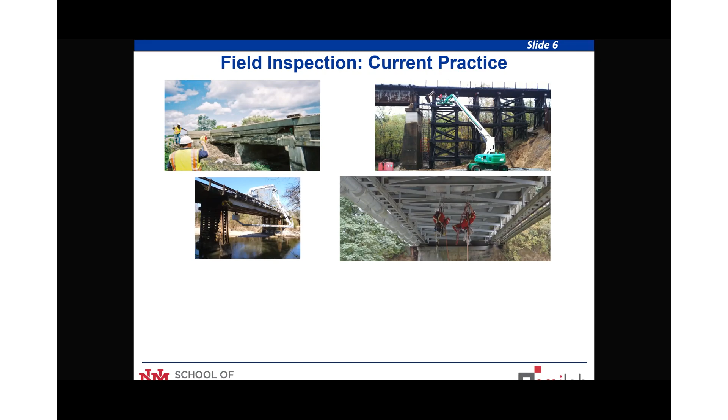So we need to do a little better than this, and from that approach we're thinking that the main decision comes from the inspection. I worked 10 years in industry, so that was the motivation for thinking about how these inspectors are collecting this information to prioritize. That's one of the core interests from Tran-SET: how to maintain and prioritize decisions from the built infrastructure out there.

We can see that, and this is at the top of the list, but humans have difficulties collecting objective information in the field, because humans are humans. So we're thinking, okay, what is the future telling us to do?

This is from the American Society of Civil Engineers. The society tells us that the civil engineer of the future will be reliant on and leveraging real-time access to living databases, sensors, and diagnostic tools to make decisions. So we think if the society is telling us where to go, universities should also go in this direction. I'm going to be talking about this data collection with technologies, and how humans can understand and be more familiar with using these technologies.

The University of New Mexico is unique not only for our national lab environment—it's a research one university, we prioritize research—but also we have a population of 67% from underrepresented groups. That's very high and very unique in the country. So one of the motivations on Tran-SET was how can we reach these minority underrepresented groups, female, from an early start.

There is an interest in attracting this first generation of students to low-cost, ready-to-use technologies to train the engineer of the future. At the same time, we try to make this technology accessible to the workforce.

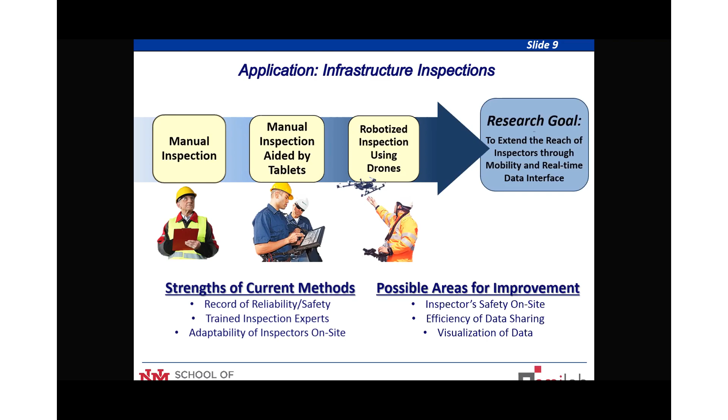In today's introduction of technology for inspections, we can see that we are doing better than before. We're bringing technology to the field, but we think this interface of data with humans can increase accessibility to this data and reduce the cost, maybe explore this interface of users and the data that is collected. And that's where the sensors become gatekeepers of that interface.

It's very important to collect these inspections to prioritize repairs, but we need to collect the information that is valuable for the owner. So I've been prioritizing on this presentation the importance of collecting displacements from railroad bridges, because owners couldn't do much with accelerations, couldn't do much with large amounts of gigabytes. They don't like gigabytes, they don't like modal shapes. They wanted to know how much the bridge is moving. So I typically stress: let's ask the owner what they need, and we'll provide them what they want.

This is a bridge monitoring setup in Chicago, using sensors attached to the rail. When the train is crossing, you can see the first two wheels, the first four wheels from the first car, are very high from the locomotive. The next ones show microstrains that are a little less, because those cars are an Amtrak car at 80 miles an hour. So you can see how sensors can tell you interesting information about the environments you're trying to explore. That's what we're looking for.

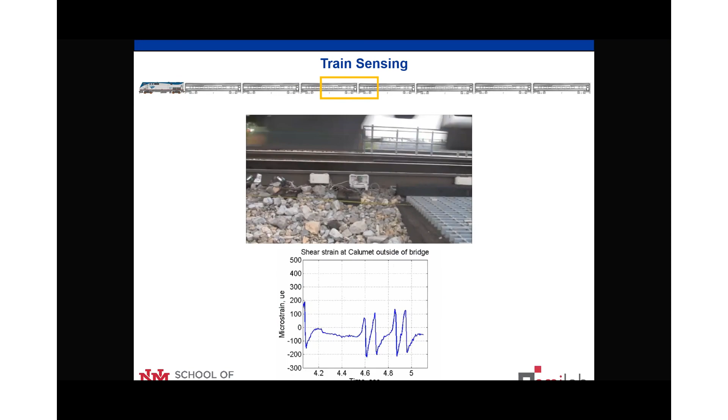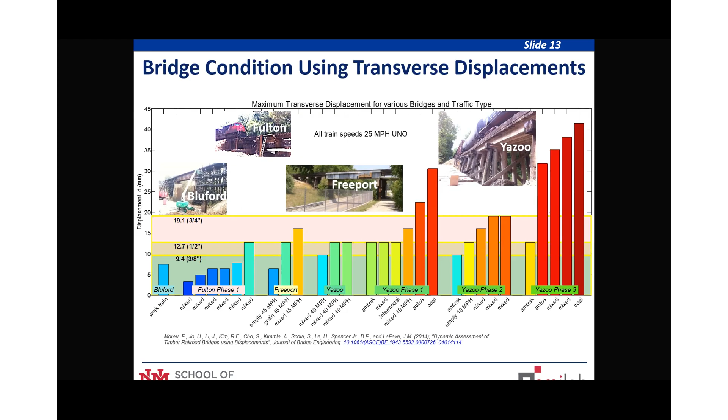So we're trying to say, hey, if we could collect these displacements with very low-cost technology, all the inspectors could attach their sensor, wait for the train, see how much it's moving, and decide if it's needed to slow the train, or if the opposite is true. If you think it's moving a lot, the sensor might tell you it's moving not as much — maybe under 3/8 of an inch, 1/4 of an inch, 5 millimeters — then you don't need to worry. Objective measurement is valuable for determining these thresholds.

We've been using a low-cost approach that's actually a convergence between low-cost technology and the accuracy we need in the field. We call it LEWIS — low-cost efficient wireless intelligent sensors. When we published this paper in the Mechanical Systems and Signal Processing Journal, it coincided with the passing of actor Jerry Lewis, so we decided to name our sensor in his honor. I'll be talking about LEWIS, the low-cost efficient wireless intelligent sensor, in this presentation.

It's based on a microcontroller from Arduino, very well known by the community. We use a low-cost accelerometer that can collect triaxial accelerations — X, Y, Z — for only $4 to $8. We get 14-bit resolution, up to 8 Gs, 800 Hz sampling rate, very linear. We have wireless XBee antennas, allowing wireless collection for about $43 to $73, depending on the range of sensors you want to build. If you build 10 sensors, the price is on the higher range; if it's a higher number, like 1,000 sensors, it can come down.

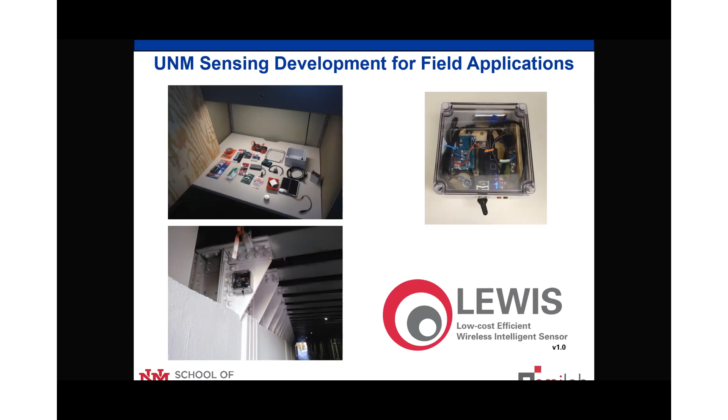We actually designed it to measure outdoors. I can show you how this resists rain or snow, or address your concern about the battery — we have solar panels that allow continuous data collection so you don't need to rely on a power cord. And we have it certified.

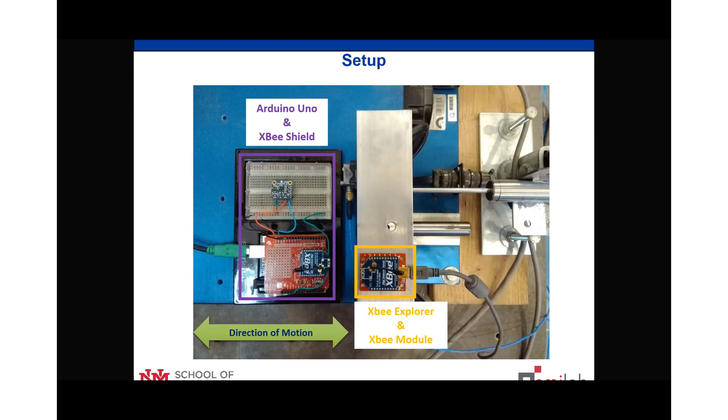So we wanted to see if this wireless sensor can measure the accuracy of the displacements we needed. We conducted experiments in the laboratory first, replicating this displacement. This is the sensor on the left — you can see the antenna on the table. This is a shake table moving horizontally, right to left on your screen. You can see how the acceleration is validated with a commercial accelerometer, and on the right-hand side you have the LVDT. This was the setup, and we wanted to see if the trains you were seeing crossing could also be collected in the field by this low-cost sensor.

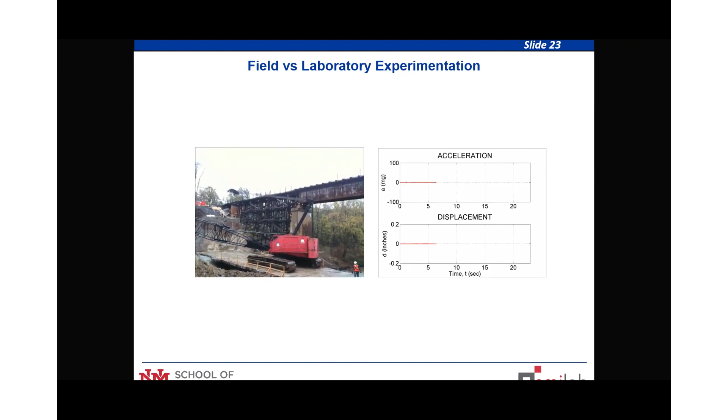I'm going to show a real train crossing event where we actually measure this acceleration, and we convert it into displacement because we cannot bring a displacement sensor onto the field. We need to double integrate with an algorithm we developed and compare if the real-time LVDT displacement can be estimated by our low-cost sensor.

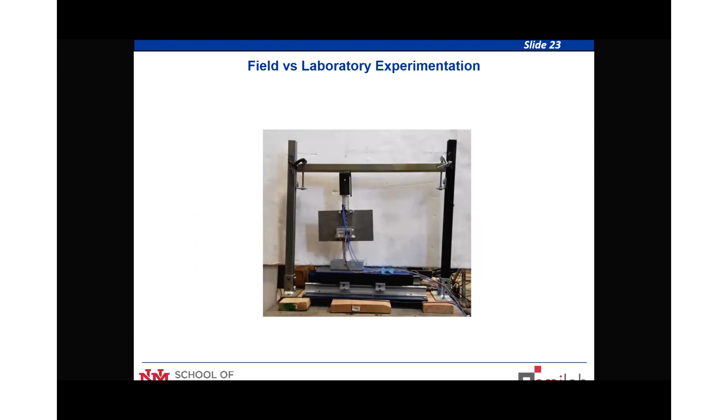So this is the real bridge. This is the acceleration on the top, displacement on the bottom. You can see that transverse displacement. And this is our experiment in the laboratory. It's an upside-down bridge, and imagine we are running the trains on the table. It's moving right and left, and we have our wireless sensor on the table like if it was the top of the bridge moving.

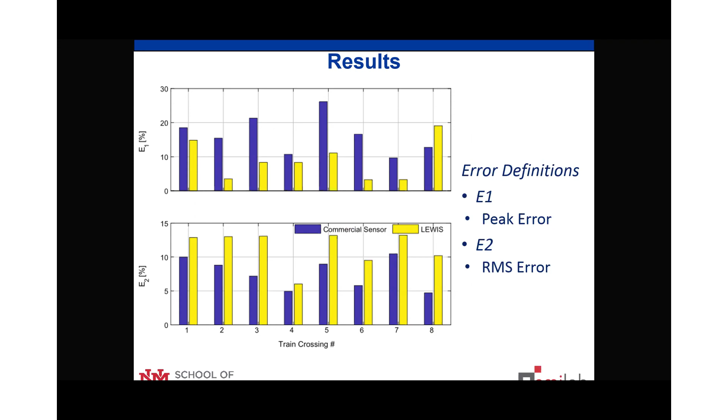We also, on this Tran-SET project, wanted to bring other technologies, and one that has been very attractive is how we can use drones to collect information of interest. So we've been interested in bringing this displacement measurement to the drone.

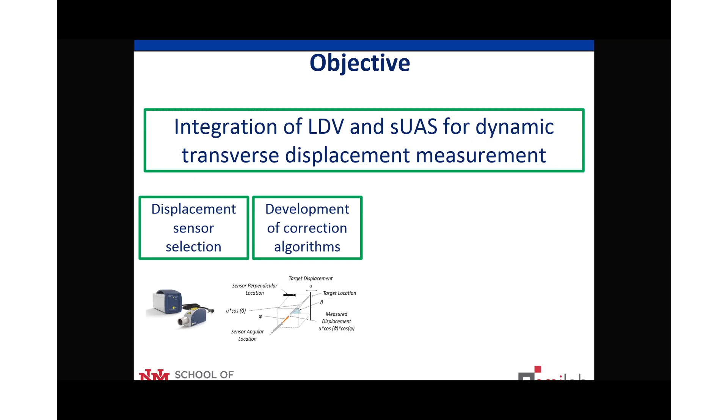When you collect a video of an entire bridge, it's a lot of data. You would like to know how much it's moving. That's why we attach this laser. Imagine we cannot attach our sensor directly. How could we measure this displacement? We would just fly our drone perpendicular to the bridge and see, with our laser on the right-hand side, if we can measure the target moving under trains.

And we did this on the field. I have a little video that I hope you can see on the next slide. We did this in Albuquerque, at the University of New Mexico, on the southwest of campus, at a balloon fiesta site where every year we have up to 800 balloons, so it's certified for doing this kind of flight.

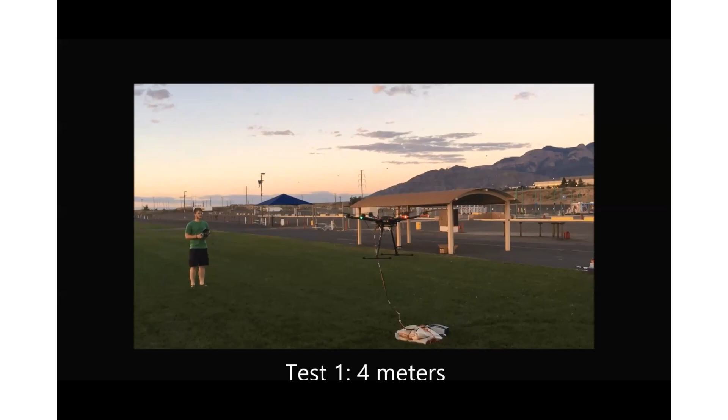So we did 3 experiments shooting the laser to our suggested flight target. As you can see, I'm moving the board like if it was a bridge, and you can see how I have the laser on the bridge and the LVDT for validation on the other side. As you can see, the laser is also getting outside of the board, which we thought was a concern. The results show that's not an issue, even though the drone may be hovering outside of your reflective tape, as long as your surface is flat, which was our assumption.

We only flew about 5 feet from the ground because that was our validation purpose. As you can see, the tether from the drone is connected to our data acquisition system. In the future, that would also be untethered. But again, we wanted to validate the ability of a laser to collect real-time displacement on your bridge.

It was actually in collaboration with the National Academy of Science, the CN Railroad—so they provided feedback—the Los Alamos National Lab, and the Association of American Railroads. They provided very practical feedback about whether this technology could be useful for them.

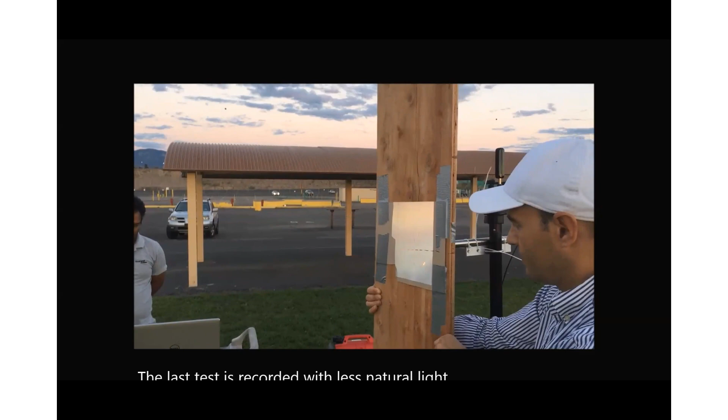We moved the drone a little farther away for 7 meters, about 21 feet, and we also collected about 30 to 40 seconds of displacement on that bridge. The idea is to validate if the laser on the drone, without a reference on the field, can achieve the same accuracy you get with your LVDT reference at a fixed point.

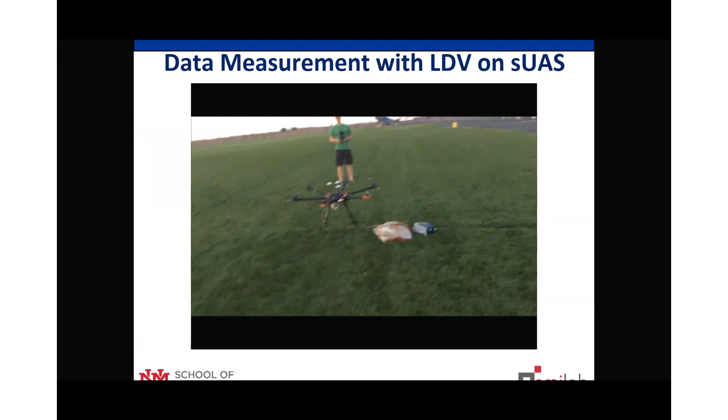This was a successful landing, and we were very happy with the experiment. The student really celebrated that we concluded successfully.

This is the data from 3 of the experiments, and as you can see, the blue and red lines are very close. We compared peak-to-peak values with the LVDT, which is the accepted reference point, and the laser, which was in conclusion a good match in phase and amplitude for these experiments.

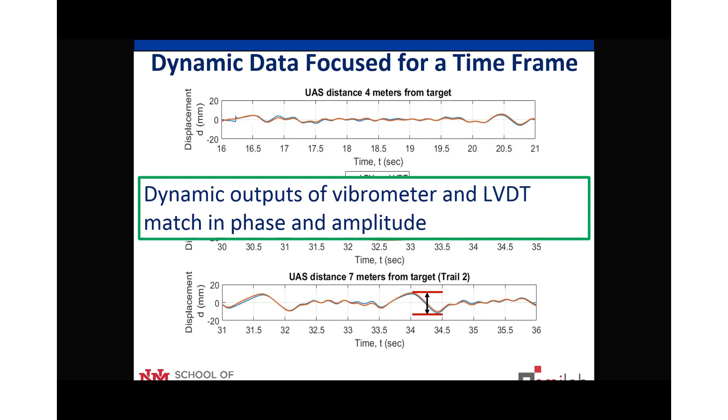Toward the end of my presentation, I see I have another 5 minutes here. I have an overlay of this exploration of technologies that we did in year 1 of Tran-SET.

As I mentioned, humans are interested in cognition and decisions based on rounded shapes, as you can see the brain on the top left. And structures are square with 90-degree angles. So we want to break this.

We wanted to bridge this intersection of time and space with inspection routines and also the visualization of these inspections. So we are interested in human perception of data, and we are measuring how humans actually feel data.

We've been using electroencephalograms, collecting how inspectors observe — in this case with different languages — and capturing the different parts of the brain where you get surprised or familiarized with a change. We are using that for inspecting structures.

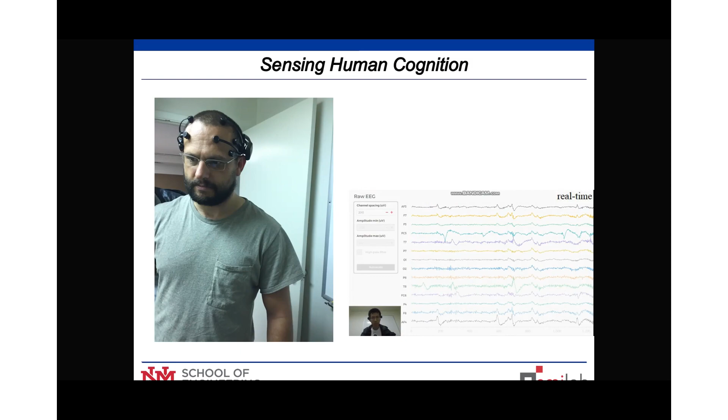It's a new area for structures, not so new for psychology. We've been exploring augmented reality. In fact, on the next Tran-SET webinar, I'll be presenting a topic on this.

It's been very successful. We are looking forward to doing more on this inspection, and I believe the next speaker will be covering how this can be used.

In our case, we have an interest in change detection. That was also done in year 1, where we wanted to inspect a bridge very quickly.

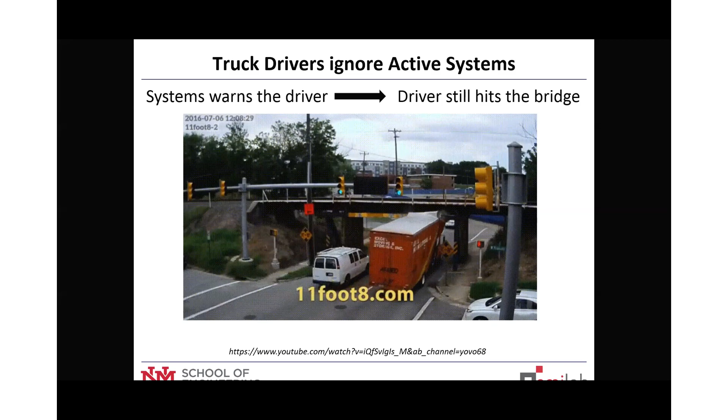As you can see, this is a sign saying overheight must turn, but the truck couldn't turn. Trucks continue impacting these bridges and breaking the infrastructure, and there are also concerns about casualties and injuries from those impacts.

So we wanted to see: can we protect the bridge with a beam, and can we actually inspect the bridge in real time? So we created a change detector.

We can overlay these impacts. We tested this in collaboration with the Chinese Earthquake Administration. We created a bumper, and I have a little video here showing how we created this impact.

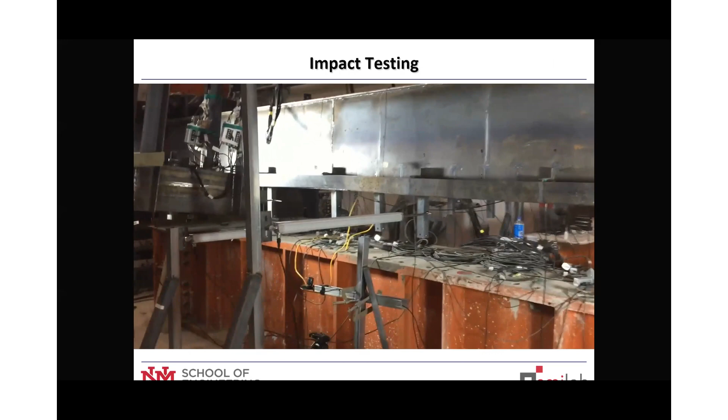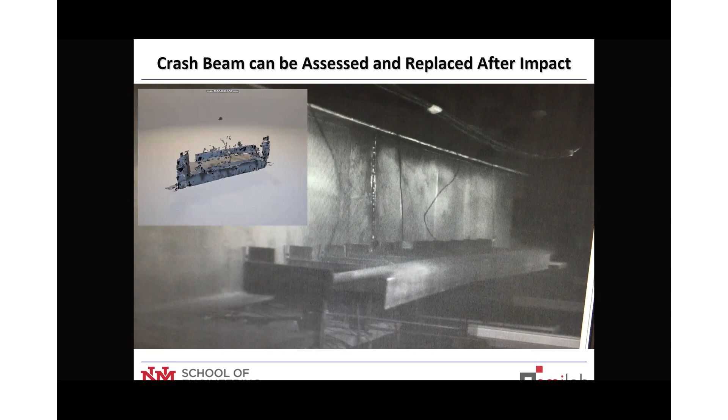So we conducted that with a 3D point cloud using the HoloLens from Microsoft, and we compare whether we need to replace the structure or not. We collected this 3D cloud, saved it with the time machine, and compared before impact and after impact.

As you can see on the screen, green represents before the impact, and gray represents after the impact. I'll be covering some of this in September.

We've also been installing this Lewis sensor on other structures, such as rockets. I have higher interest from students to put sensors on rockets than on bridges. That's been attracting this new generation of engineers to using technologies for structural performance, because the idea was to engage future users of technology.

We identified in the process that the sensor we developed for bridges can also be used for rockets, and that was in collaboration with the Albuquerque Rocket Society.

There's some interest in reusability on rockets from NASA. We had a small project that we also encouraged in collaboration with Tran-SET, and that was very successful.

So we wanted to include that in the outcomes of this student engagement, where, as you see, they program their application, have the wireless connection of the rocket, and they launch the rocket. So you see how that comes up.

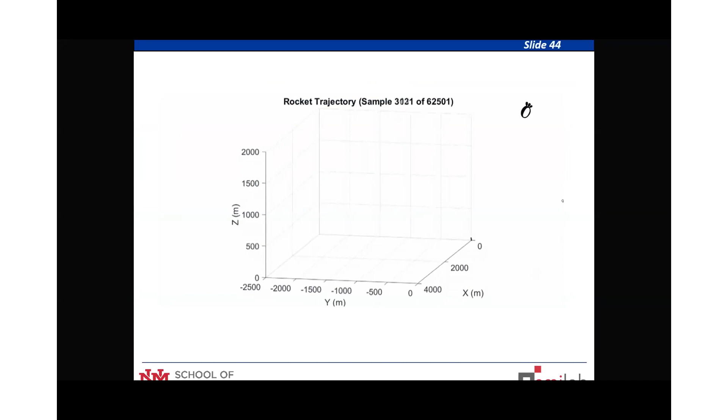That is the trajectory of our sensor that was inside the rocket. It was very, very interesting for understanding the performance.

In summary, I have a lot of positive feedback. I have one more minute here — this is an activity with high schoolers in the Summer Transportation Institute here at the University of New Mexico.

The students get to build their sensors in the morning and put them on an infrastructure the same day. As you can see, there's a lot of interest from students in actually touching sensors and connecting wires. My PhD students and graduate students have done tremendous work in mentoring them.

As you can see, this is in the classroom in the morning. Every 2 students receive 1 mentor, so that's how they get encouraged with this exposure to smart transportation sensing. They did this in the morning, for an hour or two.

We go later to the tramway and install the sensors they built to understand the performance of that tramway. So you can see, we also use this for graduate students. If high schoolers can do it, graduate students can do it too.

For the dynamics class, this was the first time we did this in a civil engineering homework assignment. As you can see, they did the same thing. If the high schoolers can do it, the graduate students can do it.

Very successful. We also teach industry about low-cost sensors. We did this at the International Modal Analysis Conference. Engineers typically don't have this hands-on experience, so we also teach them how to build them.

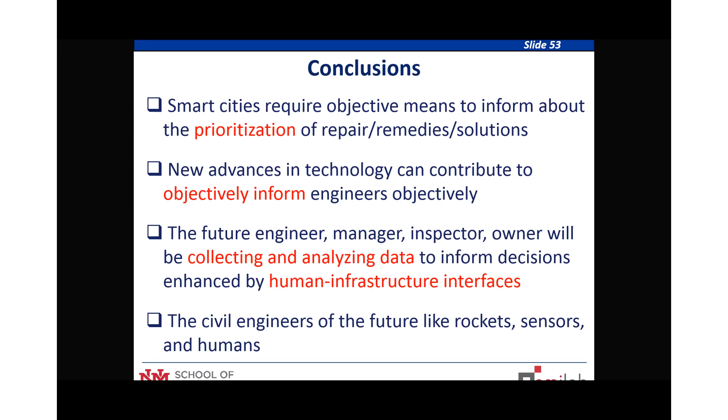We're talking about using sensors to prioritize inspections. I learned from 10 years in industry that everything that bridges this human-infrastructure interface with technology will be of interest to the engineers of the future. I look forward to the Q&A session. Thank you.

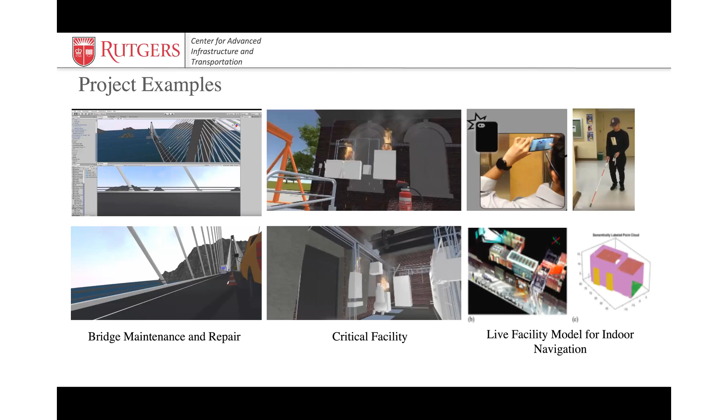So the first use case is a virtual bridge for maintenance training. It's a real scale bridge, and we modeled everything in detail, down to the nuts and bolts. It's a real cable-stayed bridge passing the Mississippi River, connecting Missouri and Illinois. So the model brings a 1-to-1 ratio into the VR environment. The outcome is you can naturally navigate and get a feeling of what it's like as a bridge inspector getting to the top of the mast. It's just a visualizing tool at the beginning.

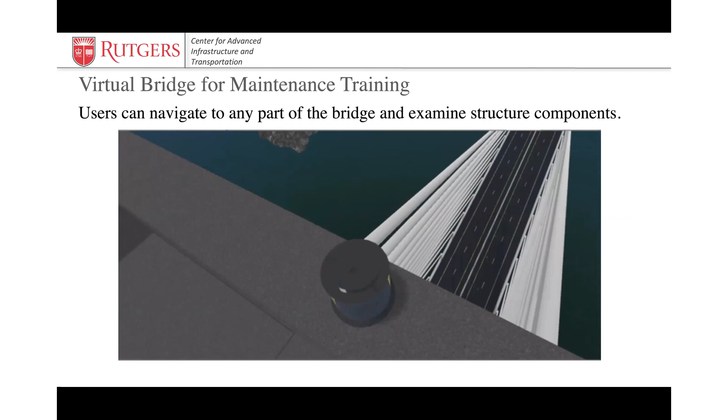Gradually we evolved this tool into a work zone simulation module. So supposedly you want to work on the bridge, doing inspection and maintenance activities. What is the proper way to set up the work zones, and how do we set it up? And for different setups, what kind of impacts occur? So in this module, the user interacts with different traffic objects, aligning signs and cones and traffic signs.

The traffic is programmable. All the traffic can be programmed in terms of responding and following traffic rules. For example, if you remove a stop sign, the vehicle automatically starts going forward. So more or less, this allows the construction crew to simulate different construction zone setups with mixed traffic.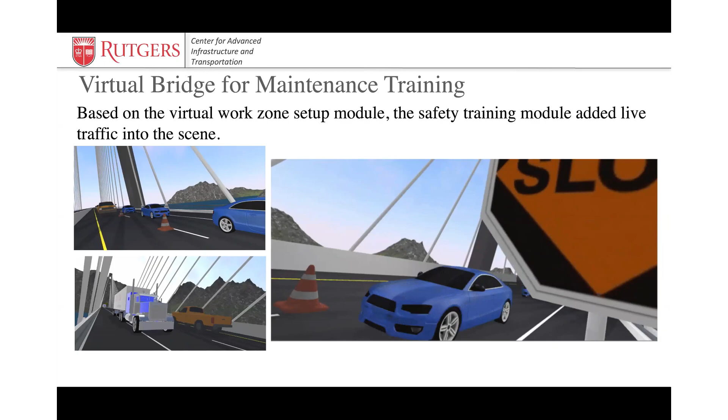It shows that the different traffic can be programmable in the sense that you can mix traffic with trailers, semis, trucks, pedestrians, and other things. And more or less, you can program the weather condition, a foggy day, or a snowy night construction scenario.

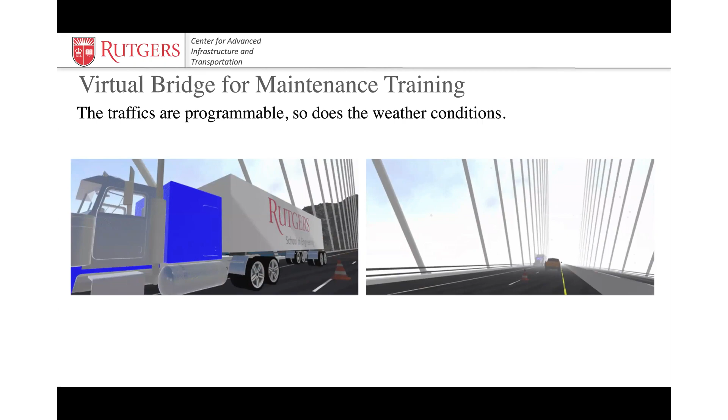So we actually work with a local union right now to simulate placing traffic cones in this virtual environment. The idea is for highway construction workers to simulate putting down traffic objects in these settings, and to simulate different traffic patterns to figure out the best way to set up the work zone, sequencing-wise.

The next example is a critical pump station which serves 3 communities. For that station, as I mentioned before, we started with reality capture to get the BIM model out of it, and then started pushing everything into Unity.

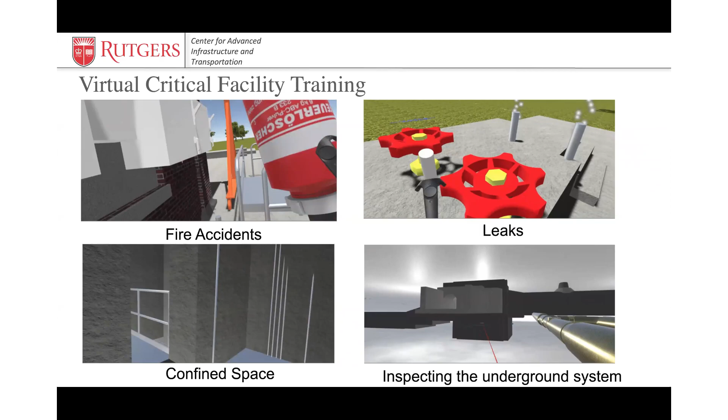In the Unity engine, we started simulating different accidents, fire accidents, how to put out a fire if there's a fire in this facility. What are the proper steps, 1, 2, 3, 4, to shut down which systems, and also how to handle leaks and other issues.

For example, the confined space - if you look at this, it's just 1 story above ground, but it's actually 3 stories deep into the ground. It connects a large sewer system into a large sewer plant, the 3rd largest sewer plant in the United States. So it's a very confined space.

If there's hazardous gas in there, what steps could we take to get out, and in what kind of time frame? So that's for confined space training.

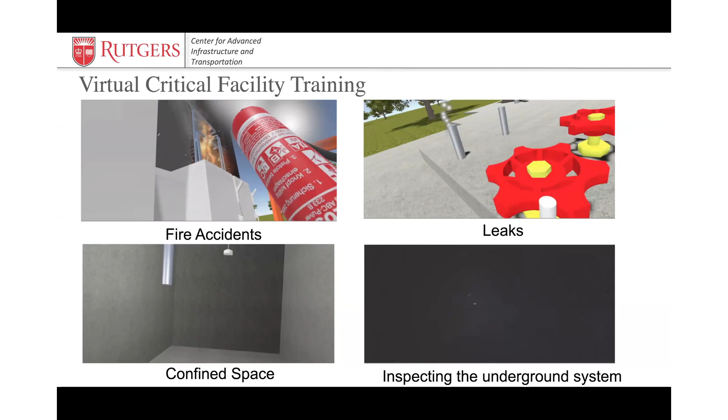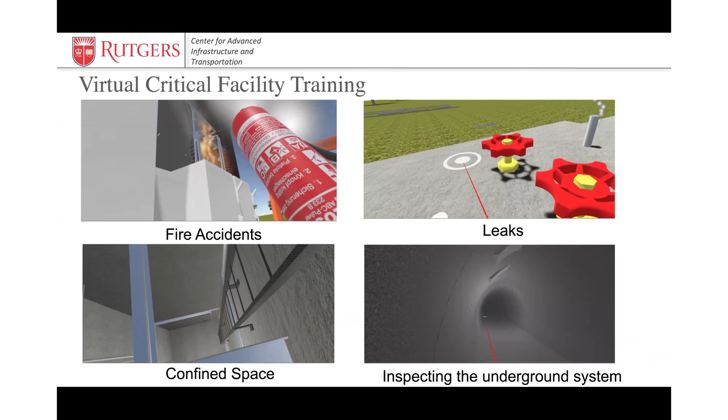And if you look at the bottom right side, it actually connects miles long sewer lines into the main sewage plant. As a navigation tool, because the lines are buried underground, no one knows what it looks like. All we have is drawings dated from 1910, paper drawings. So we built out the entire model to simulate the flows in the sewer lines, and visualize different impacts and inspect other things. So that's more in the VR environment.

The last use case is more or less around AR, augmented reality. The reason we're doing this is because if we look at the statistics, in the United States there are about 6.6 million people with visual impairment, and this number is expected to double by 2030. It's natural that when we're aging we lose vision, and when we lose vision we tend to move less, which leads to cardiovascular problems and other side effects. So adding things together, the low vision community has significant cost to the United States, and we want ways to help this population move around freely and independently, without relying on guiding dogs or other aids.

Second, if you look at the CDC's data, ASD, autism, is the fastest growing developmental disorder in the United States—about one out of every 45 people are on the ASD spectrum. In New Jersey, I think it's among the highest in the nation, about 1 out of 42. For both of these groups of people, the problem is navigating public facilities—town halls, public buildings, public transportation systems like train stations and bus terminals—which is a nightmare for many of them. Looking at ways to help them move around, we really looked into augmented reality.

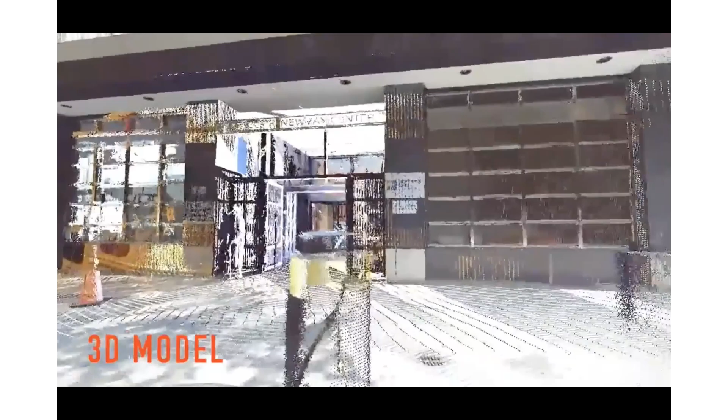Let's watch a video on YouTube. For example, this is a service institution. We mapped it using LiDAR laser scanners from inside out, then aligned the surveillance camera scenes with this point cloud. At the same time, the phone does localization when people arrive at this institution, and the app provides navigation.

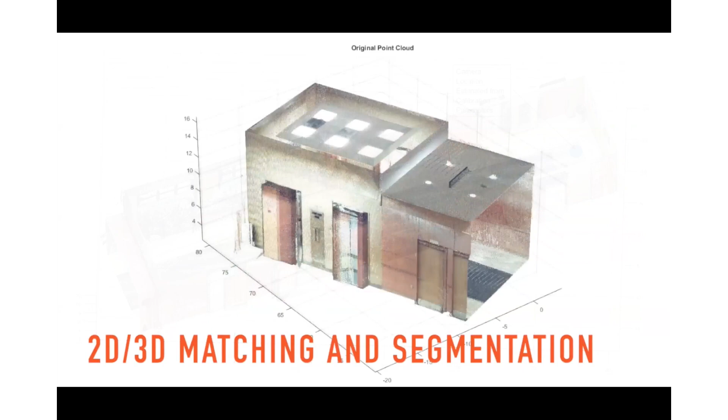Then at this critical point, the user knows the elevator is over there and takes an image of it. We can hand the phone to the user. The image can then be aligned with the 3D BIM model behind it, so they know where they're facing, at the same time they receive augmented information about different traffic information and foot traffic over there, knowing the surroundings, cast to the app. Then they have optimized paths from A to B. So that's a beginning step, where we tried solving the augmented reality problem as a navigation problem here.

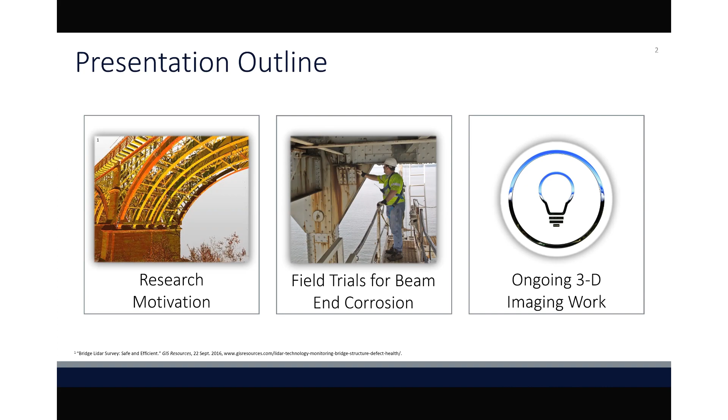3D modeling and imaging is becoming much more popular in the field of civil engineering and construction for the value it can provide in planning, scheduling, and seeing how different components of a project come together, really eliminating some of that risk on site. We wanted to capitalize on this trend and see how we could use commercially available 3D scanning technology to provide high accuracy, objective data for bridge inspection. The first area we chose to look at was using 3D scanning technology for the assessment of corrosion damage on steel bridges. This is a big issue in Connecticut and a lot of Northeast states, and something the DOT was focused on improving.

The first step was for us to find a 3D scanner that was commercially available and suited to the accuracy demands we had for section loss assessment of steel beams, and that could be used in the field by inspectors. A lot of the really highly accurate scanners are often stationary, and we wanted something we could bring with us on site—handheld, easily maneuverable, relatively low weight, and easy to use. We wanted to be able to hand someone this technology and, without a large amount of training, have them go out on a bridge and use it for inspection.

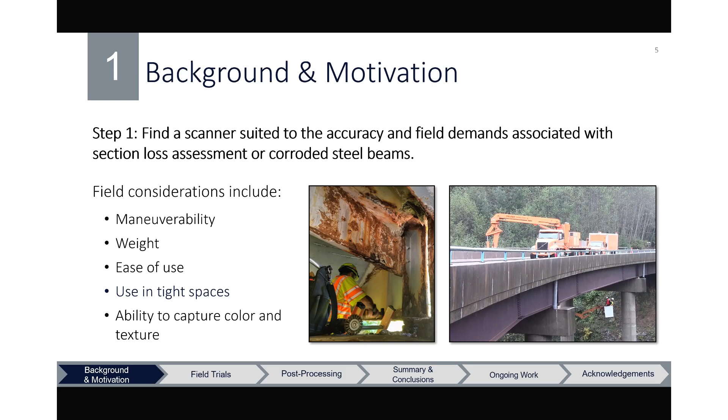After looking at a variety of scanners, we settled on the Artec EVA, which is a structured light scanner. The scanner projects a light pattern, and when it hits a surface, the light pattern becomes distorted. That distortion is read back and collected with two cameras, and the software uses triangulation to compose the 3D model.

This scanner specifically is under 2 pounds, with accuracy up to 1/10 of a millimeter. It's point and shoot, and one of the best things for our application is that it requires no on-site calibration—the scanner comes pre-calibrated. Of course, this should be checked periodically to make sure we don't have an issue after using it multiple times, especially out in the field. You can check that by scanning something of a known length, like a ruler.

We also modified this scanner slightly to enable easier field use. Rather than having to bring the laptop up on the cat beam with us when looking at these beam ends, we attached a monitor to the scanner and used extension cables, which allowed us to leave the laptop about 40 feet away and have much less equipment with us when using this on a bridge.

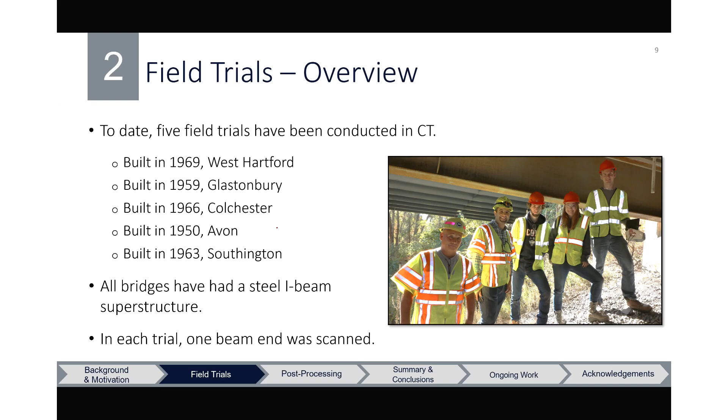Our first field trial was just to see if we could use this scanner in the field. Would we have problems with the lighting conditions? Would an inspector feel comfortable holding this scanner on top of a ladder? So we only scanned one side of the beam.

What we found is that we were able to capture the color and the geometry of the beam. We compared our measurements on site to an inspection report conducted a couple months prior, and in talking to the DOT, they actually felt more comfortable going with the measurements we could take from our model rather than the inspection report, because we could take different heights and lengths of corrosion at multiple points and validate that.

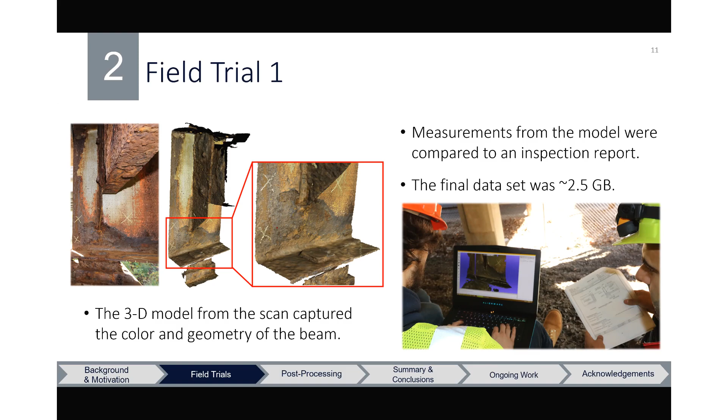In another field trial, we were moving on to see how we could capture that full 3D model. Previously, we had just looked at the one-sided scan, making sure the scanner worked and we could collect accurate data. Now we were moving on to capturing the full beam end. We used different alignment tools, and we also wanted to look into the cleaning process. Since we were only able to capture what the scanner can see, we wanted to demonstrate how pivotal it was to thoroughly clean that surface.

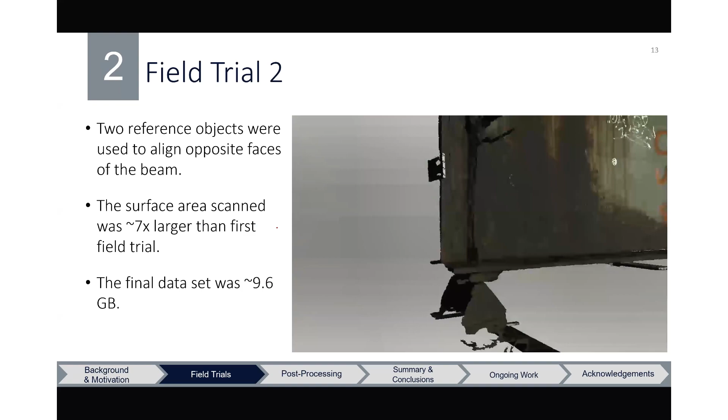So we have a model of the beam end here on the right. We found that we were able to scan one side of the beam and then scan the opposite face, without using a continuous scan going from one side underneath to the other. That was something we had tried in previous trials, and it was just too challenging for someone on a ladder to pass the scanner underneath. By using reference objects, we were able to scan one side, move our setup, and scan the other face and still generate the 3D model. We were able to capture the severity of the corrosion on the stiffener here. The overall data set for this was a little under 10 gigs.

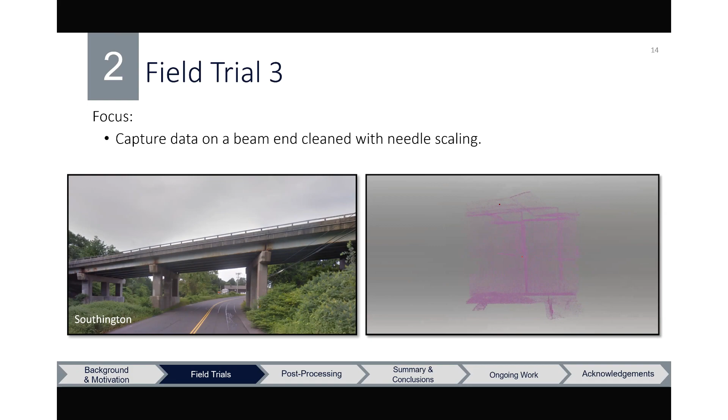What we found when we looked at this scan is the level of surface cleaning is very different between hammer cleaning and cleaning with needle scaling. This is kind of the perfect situation for using this scanning technology. So when there are applications like beam end repairs or beam end painting where the surface is going to be thoroughly cleaned beforehand, this is a great opportunity to get that baseline data on our beams.

Then we can move into what we can do with this data. There's a lot of features that come with using the manufacturer's software. The first is just being able to take measurements between any 2 points. These measurements are in millimeters, and it's easy to use; you can look at points along the length, and it's all manual. One of the other key features is using the section cut tool. This really allows you to make a variety of section cuts along either the length or the height of the beam and see how the profile of that corrosion changes along the length.

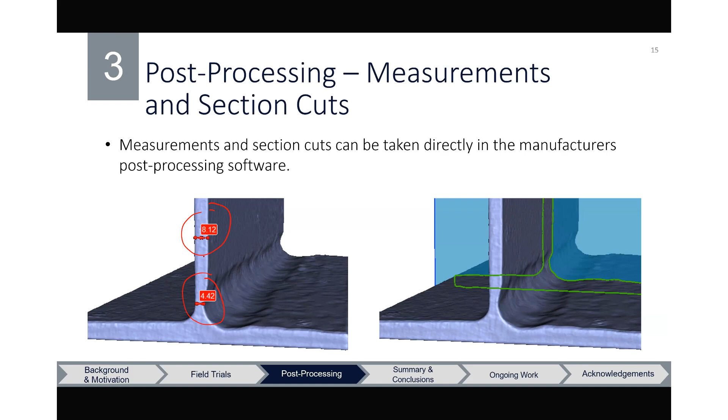When looking at that section cut tool, we used this on one of our field scans to show the severity of the corrosion. One of the challenges in typical inspections is if the inspector doesn't accurately find the area of maximum section loss, we could be reporting a higher amount of remaining section than is actually there, which can be dangerous. When we were looking at our scan, the inspection report said there should be 1/4 inch minimum thickness of the web remaining. When doing section cuts along the height, we actually found areas that were approaching near complete section loss.

Another great use for this technology is being able to take scans from different inspections every 2 years or so and see how the corrosion is changing over time. This can help us plan for future repairs and see the rate of deterioration. If we know that certain bridges are having more severe corrosion over time, we can rehab those bridges first to make sure we put a stop to it, perhaps before another bridge where the corrosion isn't advancing as quickly. And that's really what this scanning technology is: it's an additional tool for engineers to make more informed decisions.

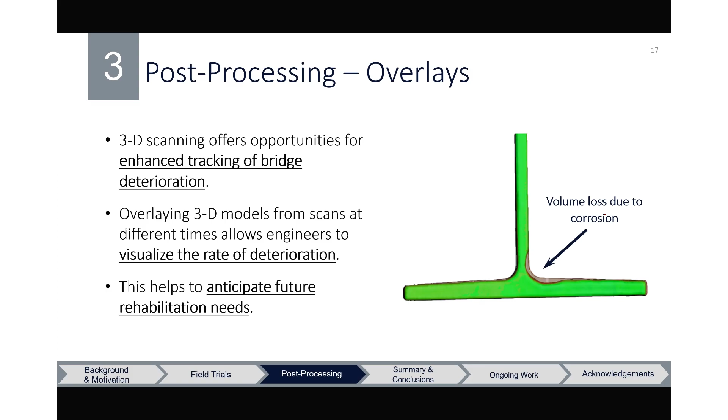Moving out of things that we can do in the manufacturer's software, we've looked at using color mapping to show the severity of section loss. This is an image of the beam end without the color and texture applied. We can use color maps which show the change in section from a reference plane, setting the reference to be the original surface of the web or the flange, and then showing when the thickness drops between a certain amount.

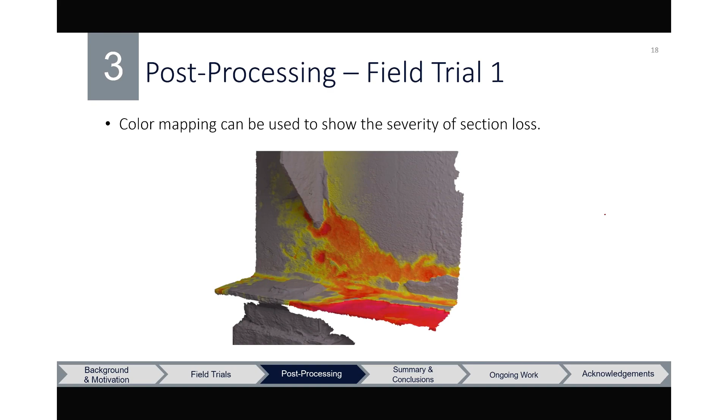We can also show before and after cleaning to really make it clear to inspectors, if they're going to use this technology, how important it is to thoroughly clean that surface. This is the model before cleaning, and this is the model after. If you look at certain locations, like right around the bottom of the web and the top of that bottom flange, there is a large amount of section that is removed during our cleaning process. And this is not using needle scaling, this is just with hammer cleaning.

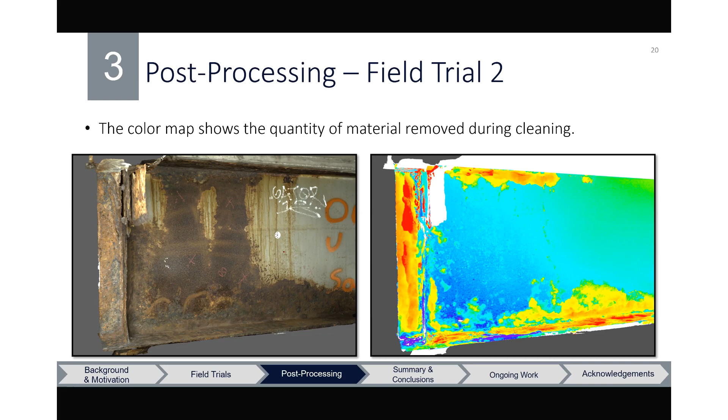We can also use the same color mapping to show that in a different way. So we can show the overlays, and we can also use a color map to show the difference between the two surfaces before and after cleaning.

To summarize, the corrosion assessment that we've been doing with these scanners is that we've shown in the field that we're able to accurately produce 3D models of these beam ends with corrosion damage. Using this technology, it provides us a method to track deterioration over time. This doesn't need to be used in every case, but on new bridges, we can go out, get the baseline scan for the as-built condition, and then once we start seeing corrosion, be able to come back and see the rate at which it's progressing.

Having this accurate information on the corrosion damage really allows engineers and bridge owners to make more informed decisions regarding the prioritization of repairs, the remaining capacity, and if something needs to be posted.

This is a project that we're working on with the Connecticut Department of Transportation, and they're very excited about the future of this technology. They've separated it out into a series of short-term and long-term goals. The short-term is to be able to perform QA/QC on the inspections and to obtain section loss information for critical bridges, also for their load rating purposes, making sure that the bridges in the state remain safe.

For their long-term goals, they want to look at a variety of different applications for the scanner, using it for tracking corrosion, also looking at 3D scanning of concrete for crack mapping, using this to document bridge hits, and to be able to scan historic bridges for the certain details that they're required to maintain.

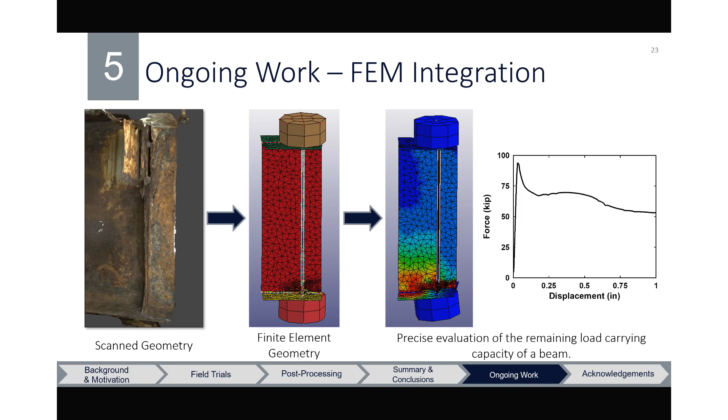We're also looking at 3D scanning the concrete. What's great about this is we can use the scanner on areas like spalls and then automate calculations like how much concrete do we need in order to repair this spall. So if we're on a bridge with multiple spalls, we can say for this project, you're going to need this much concrete. That can help them price it out, help them bid it, and really just help make that whole process more efficient.

We're also looking at using photogrammetry to do 3D scanning on a larger basis. We've actually worked with the Connecticut Department of Transportation on two retaining walls, and both had areas of concern. For this wall particularly, there was a very small shoulder and they were noticing a bulge. They wanted to see how severe that bulge was, and whether there was concern that this area may fail.

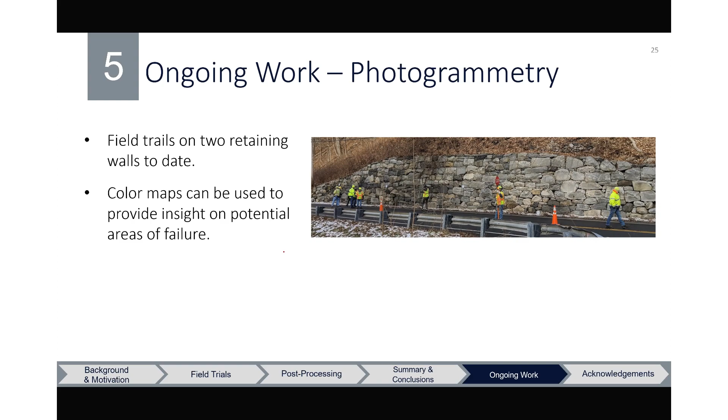What we were able to do is provide a full scan of the wall and use a color map to show them the areas of most concern that they had to watch out for. Comparatively, they were using surveying techniques to track a few points, but now we were able to show them the full area of concern.

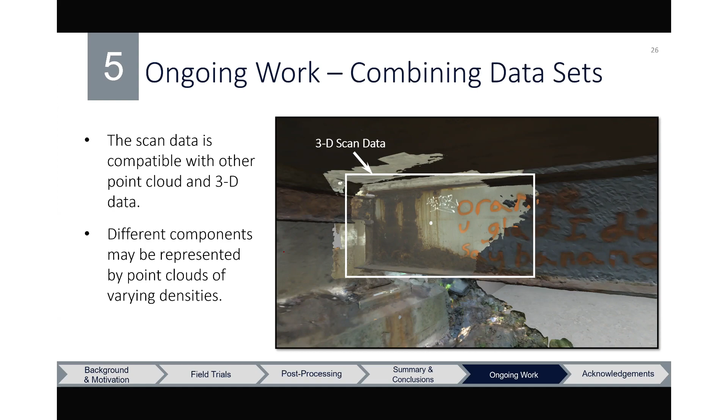We're also looking at combining different data sets. We have the option to get 3D data from LiDAR, from photogrammetry, from 3D scanning. This really allows us to make digital representations of bridges or other structures, with the areas of concern modeled with a denser point cloud, making our models more efficient. This is an example of being able to do most of the bridge with photogrammetry and just this area here with 3D scan data.

We can then take that to the next level and put this in VR, allowing people to go into the model. So when they're performing their inspections, we can have one person go out in the field and collect this data, bring the whole bridge back, and have it interpreted by a number of engineers.

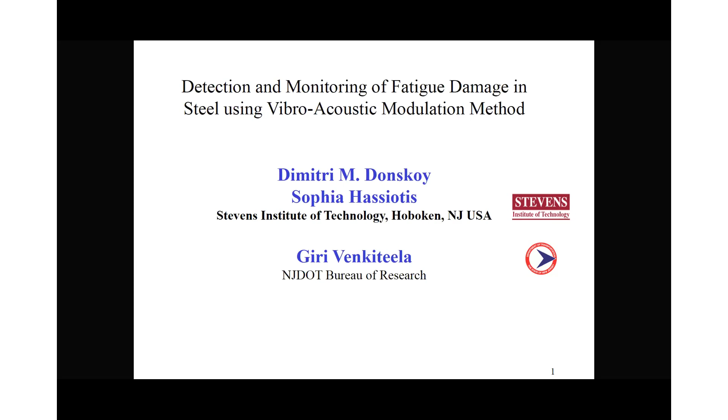The presentation here is divided into two parts. I'm going to cover the background of the research and the motivation of the research, and the actual research work will be presented by Dr. Dimitri.

We all know that steel plays a crucial role as a structural material in our infrastructure. Typically, damages in steel structures include fatigue cracks, corrosion, sometimes joint failures, welding and bolting issues, and other problems. Among these, fatigue cracking is the biggest issue. Currently, several methods are available to detect these kinds of cracks; however, most of them are expensive and sometimes laborious, and they provide very localized damage detection. Most importantly, they don't provide a damage precursor. A damage precursor is really helpful because it can alert the bridge owners, help find out the life cycle cost implications, and eventually help schedule proper maintenance for the bridges.

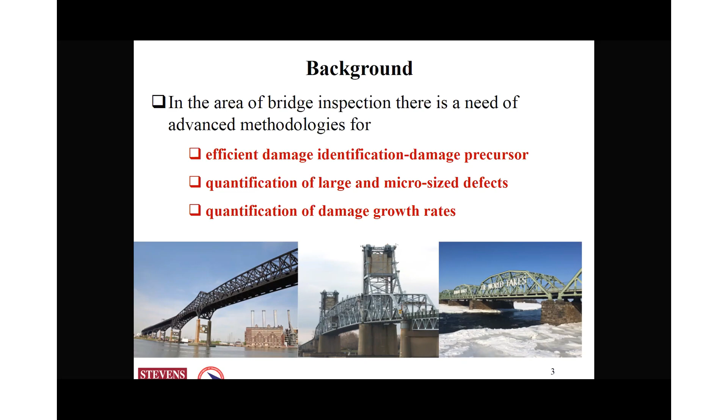Because of these reasons, NJDOT initiated this research project, keeping in mind that we need to develop advanced models or methodologies and tools that can efficiently identify damages and provide damage precursors, quantify large areas and micro-sized defects, and quantify the damage growth rates. By using damage growth rates, we can assess or predict the residual strength of the material. That's the motivation for this research project.

These are the objectives of this project, in which we're trying to develop a methodology which can detect relatively large areas and provide a life cycle cost analysis based on the damage precursor, and also provide the test protocol where we can take this technology to the field and evaluate the structural components, and finally provide specifications which we can use in the agency. So this is the ongoing research project.

So today we are here presenting the work related to methodology only, and now Dimitri will be presenting that work.

Thank you. So first I'd like to introduce the modulation method, which was developed about 20 years ago and has evolved as a very versatile non-destructive testing and structural health monitoring method for various applications. So the idea behind the method is to use two types of input signals: one is high-frequency ultrasonic signals on the order of hundreds of kilohertz, and another is low-frequency vibration.

As both signals enter the test object, they may or may not interact. They interact if there is a certain type of defect present. And this interaction manifests itself as a modulation. That's why it's called the modulation method.

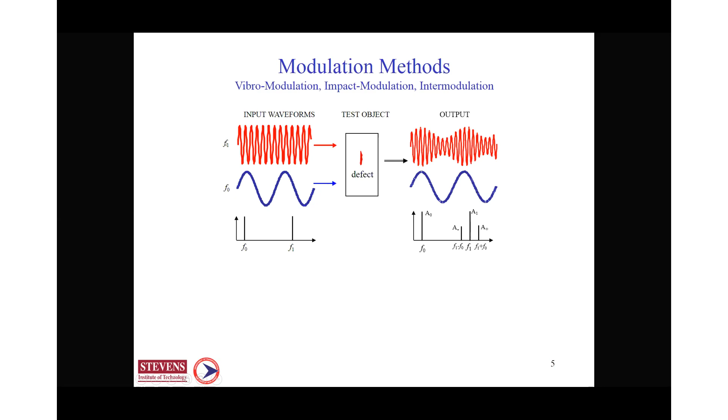The severity of the defect is estimated by the ratio between the sidebands and the carrier amplitude. This is also called a modulation index, which I'll introduce a little bit later.

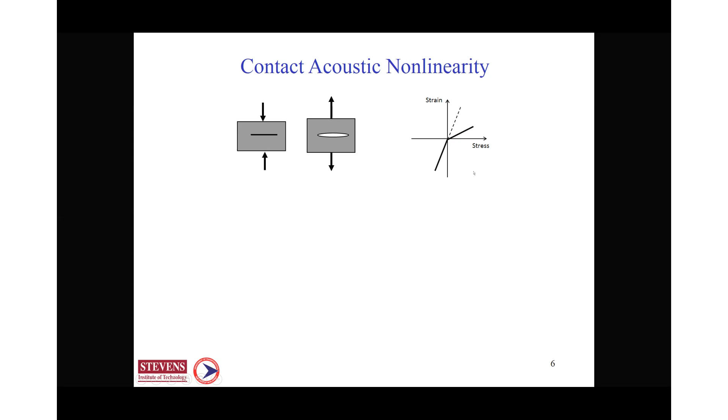The physical foundation behind this nonlinear interaction, which leads to modulation between the signals, is based on a so-called contact nonlinearity. In a simplistic way, consider the defect as a crack which could be closed or open, and respectively the stress-strain characteristics would be quite nonlinear. In this case, it's piecewise linear. Of course in reality it's a more complicated mechanism, which could be illustrated in these pictures.

It could even be hysteresis type, depending on the different materials. So all of these nonlinearities lead to the modulation.

This slide shows a simple explanation for the modulation effect. Again, consider two signals entering the damaged particle. The low frequency vibration creates closing and opening of the crack, and respectively high frequency acoustic waves propagating from this closed and open crack propagate with higher or lower amplitude, leading to amplitude modulation.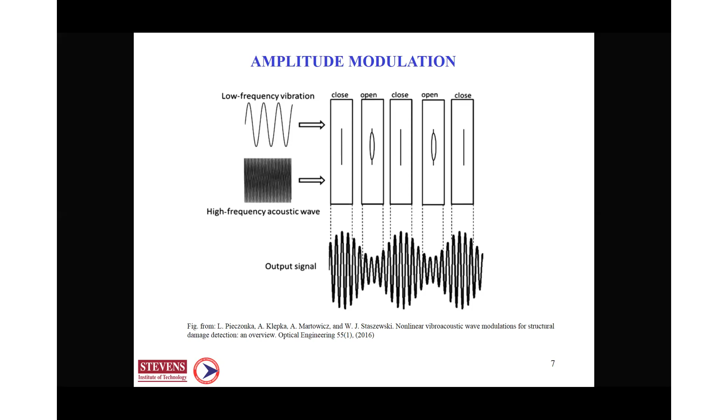Again, the ratio of the sideband amplitudes to the carrier amplitude frequency, expressed in logarithmic scale, we call the modulation index, in dB scale.

If we measure the modulation index in a reference article without defects and in a defective article, the difference between these two modulation indexes, again in dB scale, we call the damage index. The higher the damage index, the greater the severity of the defect.

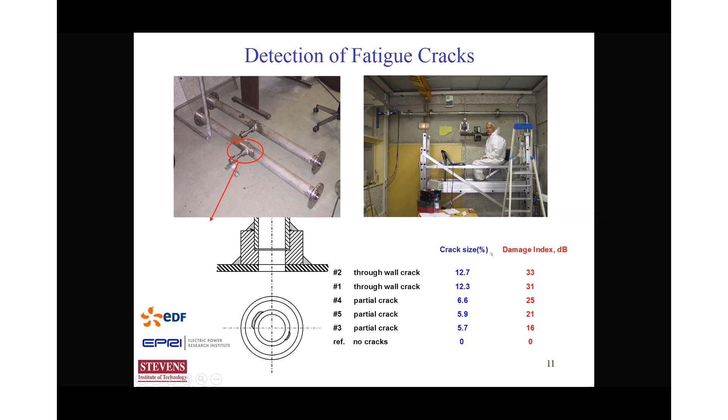We also applied this method for many different applications, for example, for aircraft, gun barrels, etc. This is one of the interesting applications where we used this method to detect cracks in railroad couplers in Australia.

This method requires modification because of the nature of the test article, so we cannot really apply shakers as we did for aircraft or pipes. So here we modified the method and called it impact modulation, where instead of low frequency vibration, we simply use a hammer to hit the object and see the related modulation.

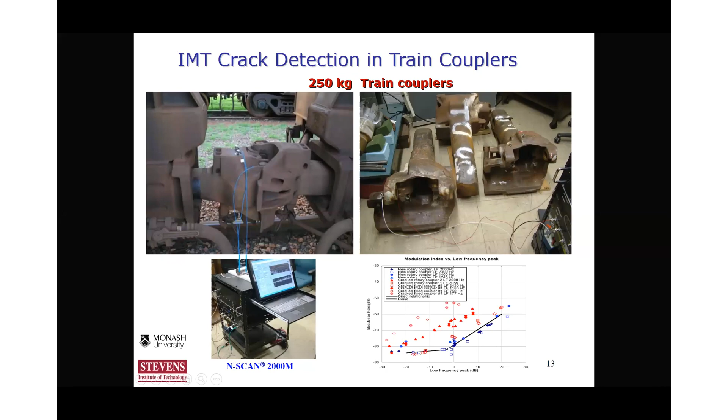You can see here the results of the test show that couplers with cracks exhibit a high level of modulation compared to the reference coupler without any defects. Here also is the severity of the impact versus the modulation index.

This is very well correlated with the damage index we introduced. So this is a very intriguing possibility to try to implement in real measurements, to have a damage precursor, and that was one of the goals of this project.

This is another example of the ability of the vibroacoustic modulation method to detect the precursor of damage. In these images, the gray area shows the damage development, illustrated with the ultrasonic microscope.

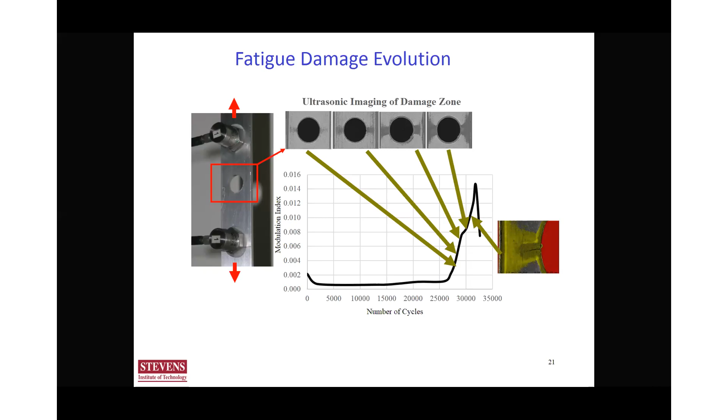So this method, although quite sensitive to damage development, these two slides illustrate the comparison between the vibroacoustic modulation method and conventional ultrasonic techniques, and next the eddy current technique. Here are screenshots from the standard ultrasonic detector. The area of damage is supposed to be here, and this is the fatigue life of the sample.

The visual crack appears at this point, and this curve represents the growth of the modulation index. We start seeing growth using vibroacoustic modulation at about 80% of the fatigue life, while the only indication shown on the ultrasonic screen appears at about 90% of the life.

Similarly, we see the screenshots from the eddy current technique. Again, with vibroacoustic modulation we start seeing it at 80% of the fatigue life, while eddy current, similar to ultrasonic, detects it at about 90%.

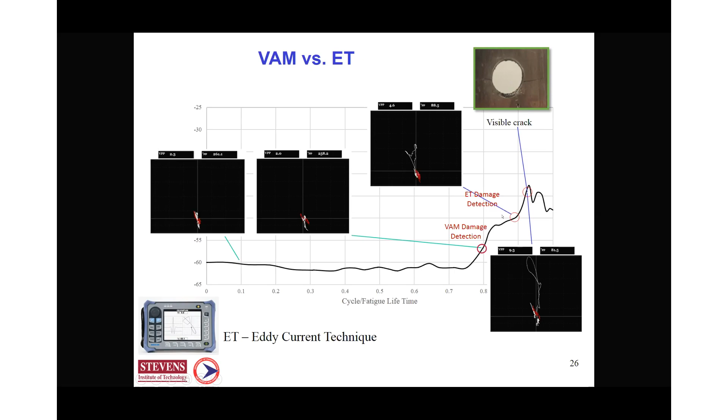To summarize, this method has a number of important advantages. It works for various materials and complicated geometries. It's very fast, and it can interface with simple data output. Basically you can set it up with a red and green light, which would be very advantageous for automated monitoring and detection. It's a global technique, so it doesn't require sensor scanning, and it quantifies damage severity based on measurements of the modulation or damage index.

However, there are two major disadvantages. First, this method requires an established baseline or reference, which is fine if we use it for monitoring, but if we just want to use it for detection, that may not be available, which is not good news.

The second, very important disadvantage, or big problem with application of the method, is that structural connections may reduce the sensitivity for detection of small defects and precursors due to their own contact nonlinearity. This was illustrated on this slide — consider a structure which has many other contacts.

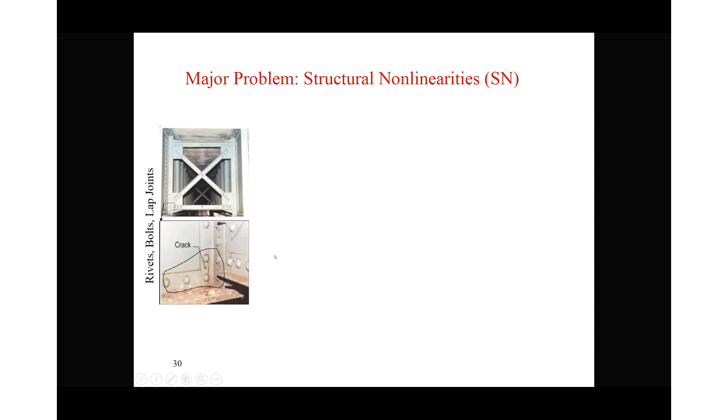So we have a defect like a crack, which has a contact nonlinearity, but we also have rivets and other connections which have their own contacts, which may lead to nonlinear interaction of these input signals. So welding, there could be some area with two parts in contact. You can have chipped paint, contact between wire ropes, etc. And all of this may create a high background nonlinearity, which would therefore shadow the actual measurements of the damage.

So one of the goals of this project was, if possible, to still detect the damage in the presence of high structural nonlinearities. And so we have quite interesting results here, which I will illustrate in a couple of the following slides.

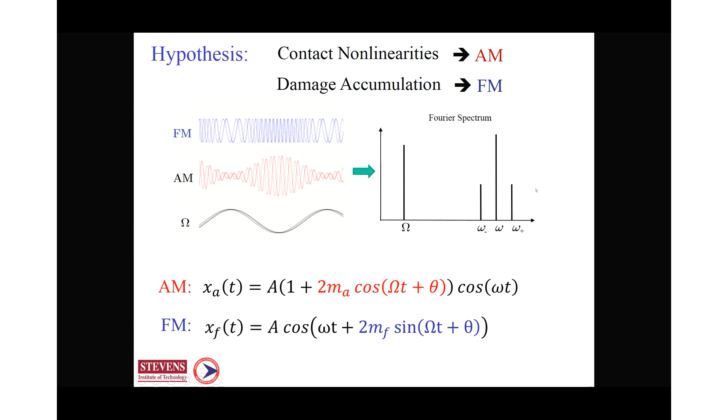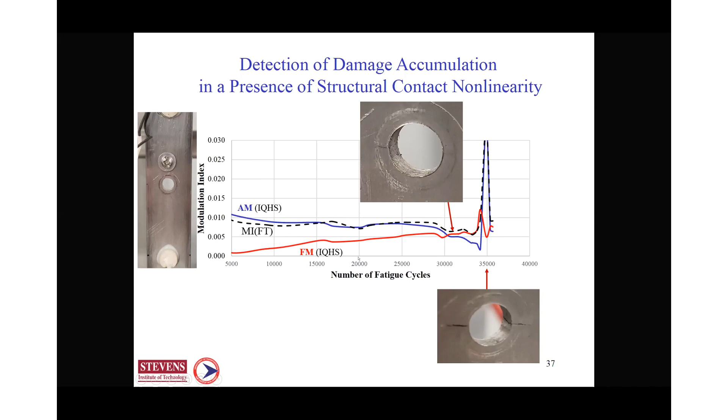Another important feature of this method, or the drawback of the current method, is the inability to detect damage without a reference. So we addressed this problem, and I will present the results of this research.

So here is what we did. We excited vibration signals with different amplitudes applied to the same signal. First we applied a low level of vibration using the same high frequency signal, and then we measured the modulation index MI1. Then we increased the amplitude of the vibration signal and measured again the resultant modulation index, which is now MI2.

Now we hypothesize that the ratio of MI2 to MI1 would be proportional to the ratio of the amplitude A2 to A1, right?

There's a coefficient K, which we hypothesize that if there's no damage, the increase in modulation index would be proportional to the increase in amplitude of vibration. However, damage introduces nonlinearity, so that linear relationship may not work. Damage would indicate that this is no longer a proportional relationship, so the parameter K becomes greater than 1.

The next few slides I'll devote to our plan for in-situ vibroacoustic measurements using bridge ambient vibration. One key parameter here is the low frequency vibration, which we introduced in the previous test using a hammer or a shaker. But in the bridge, especially for monitoring, that would probably not be practical. So the actual ambient vibration of the bridge due to traffic or other environmental input could be used as one of the input signals.

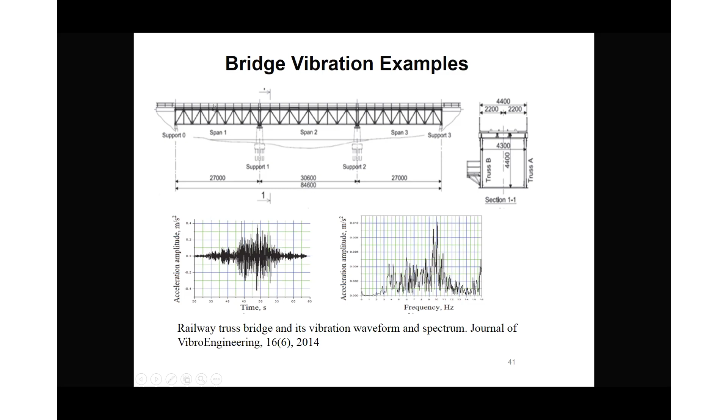Again, we start seeing a large increase of vibration amplitude due to traffic here. There's another example, and again we see a different type of vibration signal from different sensors, and its spectrum, which is in the range of a few hertz, exactly what we would like to use.

And then we will have processing to use both signals to extract all of these parameters — modulation index, K index, and others — which I discussed previously.

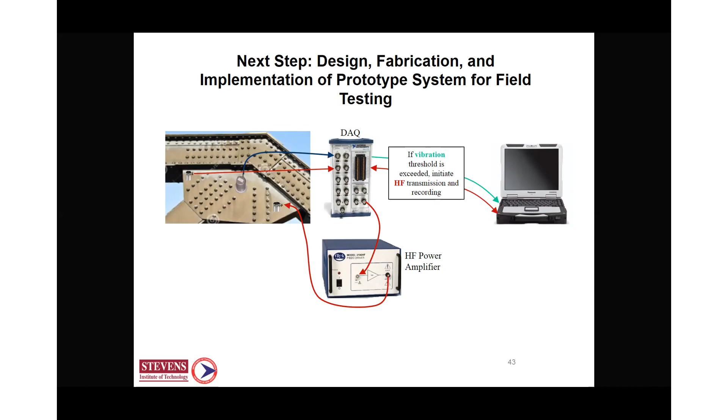In summary, I'd like to emphasize that vibroacoustic modulation method reliably detects and monitors damage evolution from micro defects to macro cracks. This method works equally well in the laboratory for a variety of materials — metals, composites, ceramics, glass — to detect fatigue damage, stress corrosion cracks, delamination, and it was implemented with some success for field test measurements. Yet the major problem with wide implementation of vibroacoustic modulation is contact-type structural elements, such as bolted connections, which create significant baseline nonlinearity, limiting practical implementation.

Despite many years of research in different laboratories, there are not that many practical implementations of the method. The two major outcomes of our project are: first, we've been able to separate two types of modulation, FM and AM, and using this separation we could still measure the onset of damage development even in the presence of high-level structural nonlinearities. That opens up the possibility for wide implementation of this method in practice. Second, we also found that we can use vibroacoustic modulation without reference, thus enabling not just monitoring but also testing as well.